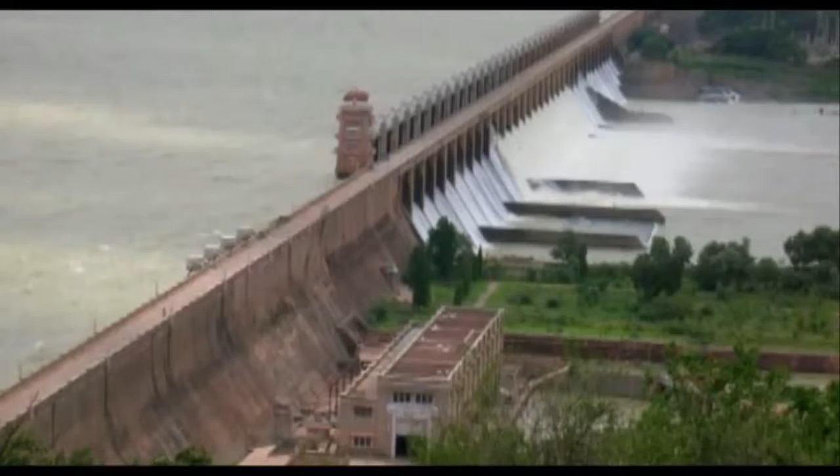The agony of a population living in constant fear of an imminent deluge downstream an aging dam. Water is a vital element that sustains life on this planet Earth. Our ancestors developed reservoirs to store vast amounts of water to support civilization. The structures erected for the purpose are called dams.

Over the years, the size and shapes of dams have undergone tremendous changes, and their purpose diversified significantly, so as to include power generation. But are we asking too much of nature and making the most beneficial discovery of all times the most potent water bombs?

The mighty Western Ghats guarding Kerala, the southernmost state of the Indian peninsula. It is the womb of 44 rivers, including Periyar, the longest river of Kerala. It is across this river that the over 100 years old ailing Mullaperiyar Dam is haplessly awaiting its inevitable destiny. An imminent deluge which may spell the doom of an estimated 2.5 million inhabitants downstream.

And what is more alarming is that its days are numbered and the nightmare may turn to a reality at any time. Not only the local population downstream, but a host of cities and townships, along with all their progress, are in peril in the event the inevitable happens.

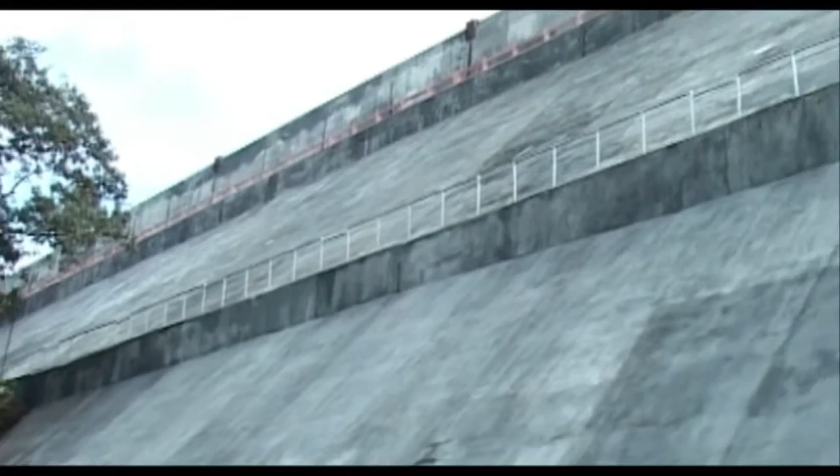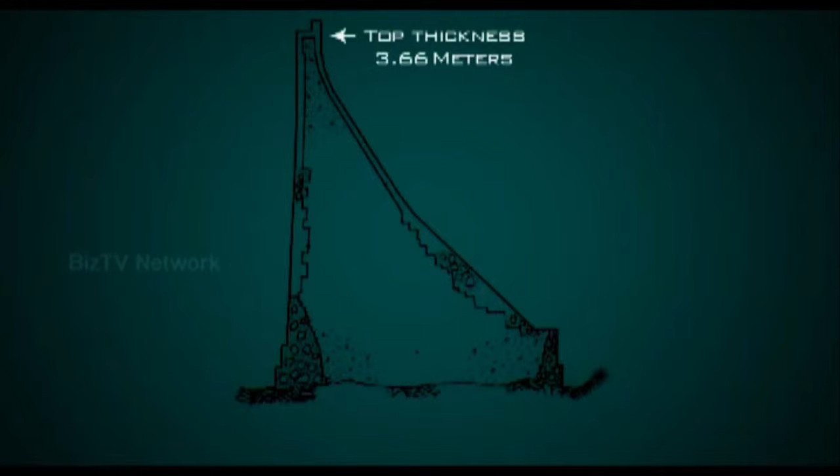The story of Mullaperiyar Dam dates back to 1895, when it was constructed across the river Periyar in crude lime surki mortar, at a time when dam engineering was in its infancy. The main dam has a length of 366 meters, a top width of 3.66 meters and a base thickness of 44.2 meters. The height of the dam from the deepest foundation is 53.66 meters. The gross capacity of the reservoir is 15.662 TMC.

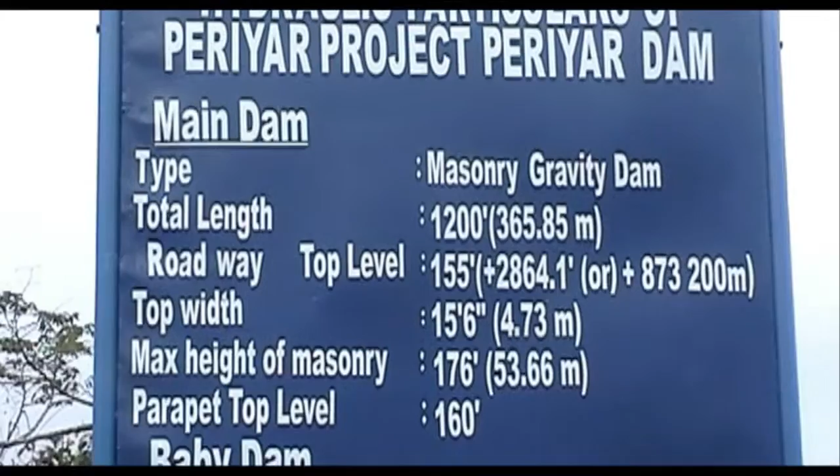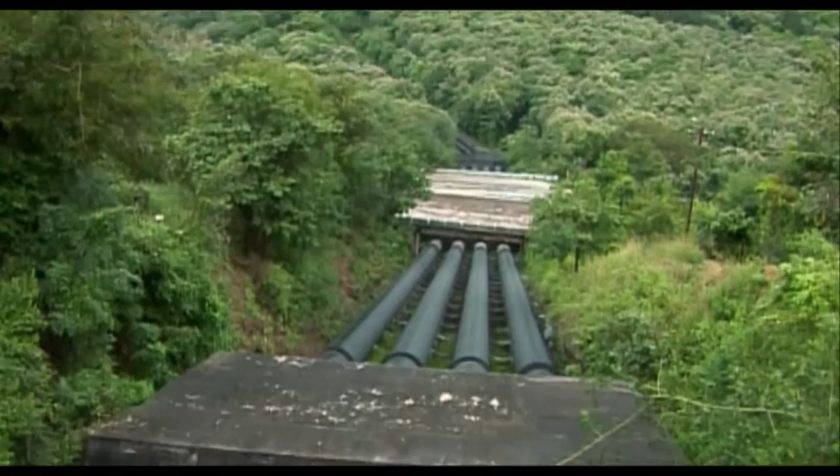The 244-kilometer long Periyar is abundant with 435 TMC of fresh water per year. It originates from Shivagiri in the Western Ghats at an elevation of 2,400 meters from sea level and joins the Mullayar downstream at an elevation of 850 meters. It is at this elevated juncture the Mullaperiyar Dam has been built for the noble cause of catering to the irrigational needs of the neighboring state of Tamil Nadu

under a 999-year lease agreement. It may be noted that the agreement was entered into by the then Maharaja of erstwhile Travancore, His Highness Sri Vishakam Thirunal, with the then Madras government as much as 61 years before India got independence from the British, and that too for 999 years, a duration unheard of in history and unfair by any standards. In fact, it was a benevolent agreement between the two states.

The agro producers from the land irrigated by this water have been serving the food needs of Kerala in a significant manner for years. A carelessly entered subsequent agreement by the two states allowed Tamil Nadu to generate electricity using the waters of Mullaperiyar. However, the fact is that the total economic advantage for Tamil Nadu is stated to be as much as rupees 7,250 million from agriculture and power generation per year, as compared to the meager annual income of rupees 1.03 million for Kerala by way of lease rent and fee, while risking the lives of 2.5 million people.

Greed is just human. But what happened in the case of this dam is that it was stretched beyond limits, and no one is bothered about the fact that the dam was aging and weakening by the passage of time. So far, so good. But it's like milking a cow beyond its age and productivity.

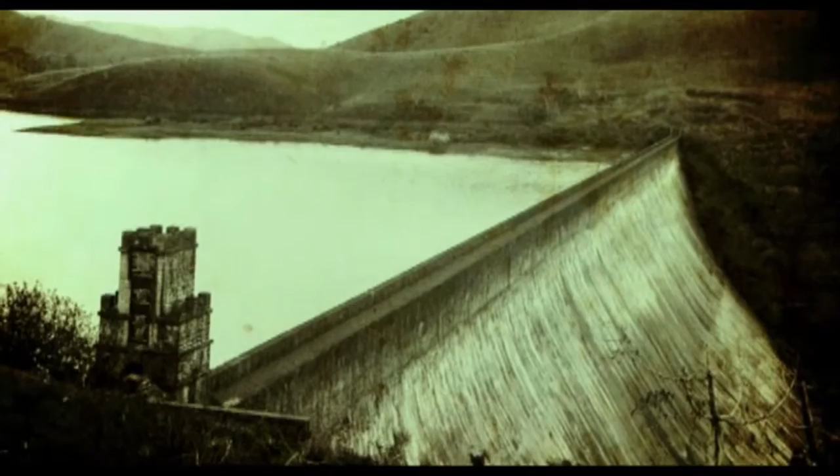The structural weakness of this dam, which has outlived its lifespan by several years, was evident from its very inception. Even the British engineer Pennycuick, who designed the Mullaperiyar Dam, had not guaranteed more than 50 years lifespan for it. It is true that there are more than 120 large dams in India today which are more than 100 years old. But the grim reality is that all these dams which have outlived their lifespan are equally prone to failures at any time, according to the experts.

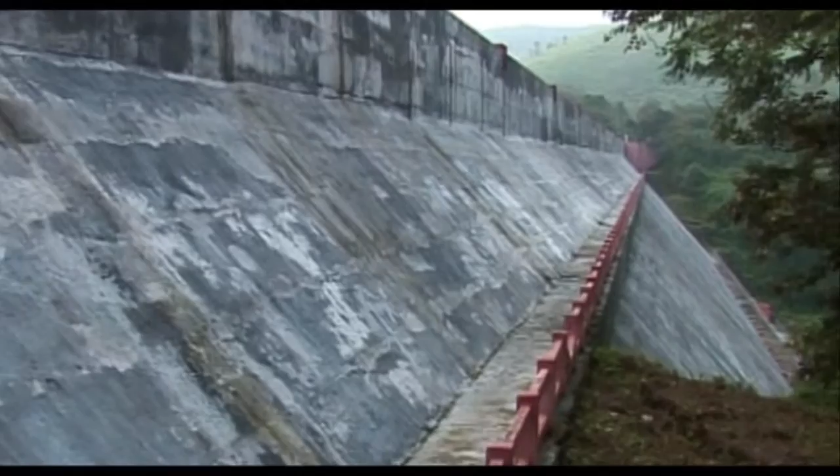It is estimated that 85% of all large dams, numbering about 40,000 all over the world, would have passed their projected lifespans by 2020, with the majority in the US and China. And here is a dam which is 100 years old, leaking from head to tail. Lime surki concrete, a very inferior concrete, constitutes almost 2/3 of the dam's core.

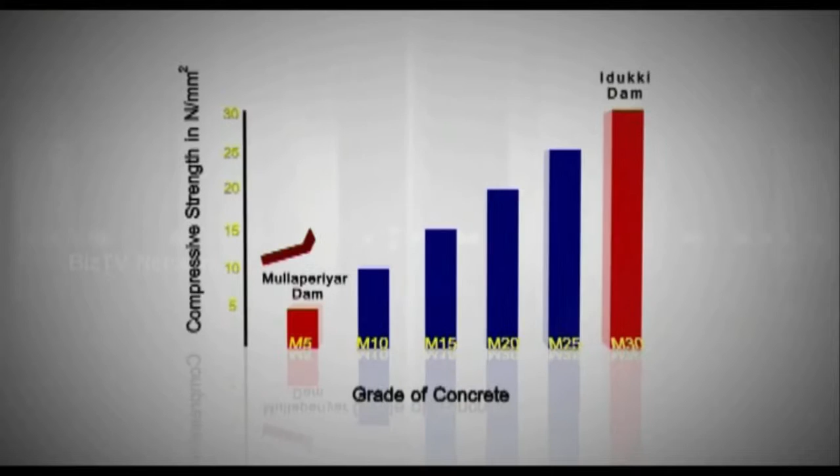This concrete, categorized as M5, is much lower in strength compared to M30, being used for major dam constructions, like that of the Idukki Arch Dam downstream of Mullaperiyar. M30 concrete has almost 6 times the strength of the lime surki concrete used in Mullaperiyar Dam.

Over the years, the strength of the surki concrete has further come down due to the continuous leaching of lime from the dam's core. The deteriorated downstream condition of the dam was exposed when the water level went to 109 feet. No repairs can be done below this level, since there has always been water below this level since 1895. Even though 2 attempts of grouting were made in the 1930s and 1960s, they were not able to completely fill the cavities formed due to the leaching of lime.

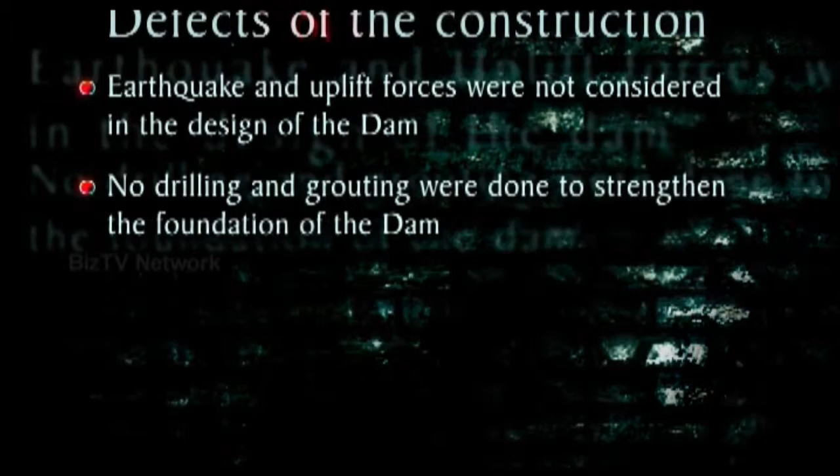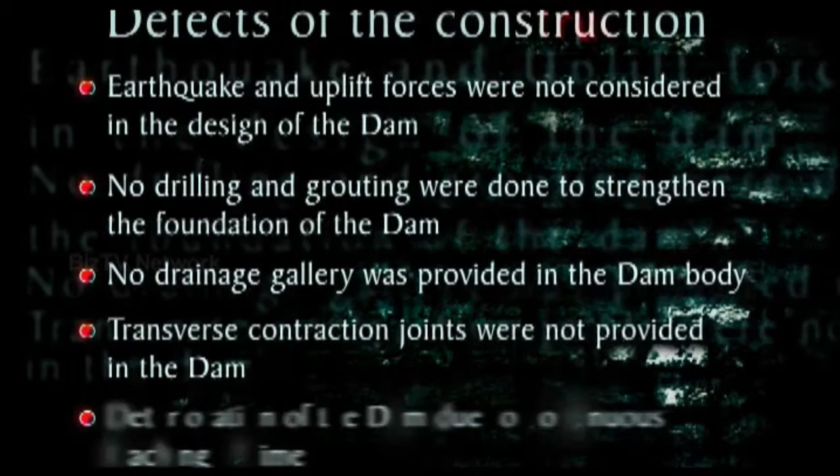Cosmetic patchworks being done on the body of this ailing dam would not make it safer or stronger, because the ailments of this old dam are inherent and deep-rooted. Some specific defects of the construction include: earthquake and uplift forces were not considered in the design of the dam. No drilling and grouting were done to strengthen the foundation of the dam. No drainage gallery was provided in the dam body. Transverse contraction joints were not provided in the dam. Deterioration of the dam due to continuous leaching of lime.

What makes the case of the Mullaperiyar Dam more startling is the fact that it is situated in an active fault zone, which makes it more vulnerable to failure in the event of an earthquake of moderate intensity. The dispute has been going on for quite a long time, but unfortunately the authorities are not thinking about the fate of poor people in 4 districts. Let's say if something happens to the dam, some earthquake or something like that, they will simply be washed away.

Within a span of 2 days, 2 tremors of mild intensity occurred on 5/11/2010 (M2.0) and 6/11/2010 (M2.9) in the 50-kilometer range of Mullaperiyar Dam, causing panic. Even though these earthquakes are minor in nature, they need to be viewed as an indication of the increased seismicity of the region surrounding Mullaperiyar Dam.

Kerala is a state blessed with pristine rivers in plenty. Landslides and floods have been quite prominent in multiple parts of the state. A heavy landslide is more than enough to cause high tidal waves that can easily disintegrate the entire dam. Torrential rain due to global warming is another threat initiated by humans. Torrential rains and floods are the ones that can break any dam, and global warming has of late increased the incidence of untimely rains and floods. The Mullaperiyar Dam is in no state to sustain such a monstrous downpour. Amid these lingering fears, the water level continues to rise during every monsoon.

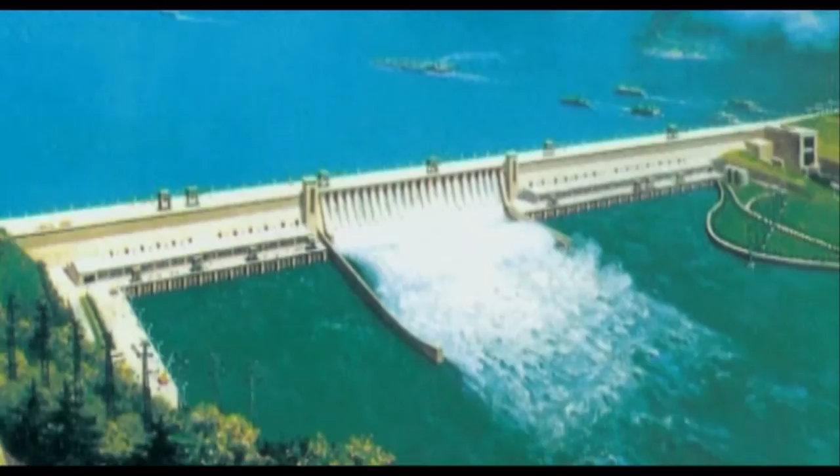The Three Gorges Dam, located in China, which is the world's largest hydropower project, reached the highest water level in July 2010 due to torrential rain, which affected over 38 million people and resulted in over 1.3 million people being evacuated. A dam's failure can happen in two ways.

One is due to earthquake failure. In earthquake failure, the heel means where the dam stands. If you have the water in the dam like this, this is the portion where the dam's heel will be having tension cracks. If the earthquake comes, it will actually move like this and it will break and fall like this, or it will break in between.

But as far as the flood is concerned, when the flood is coming, the dam will actually be balancing. The water pressure is acting like this and the self weight of the dam is acting downwards. So once the water is flowing over the dam, this equilibrium will be lost. So the dam will be overtopped. It will turn down. Most important thing is that 40% of the dams in the world failed due to flood. What is required for a catastrophic deluge in Mullaperiyar is a torrential rain or earthquake or landslide.

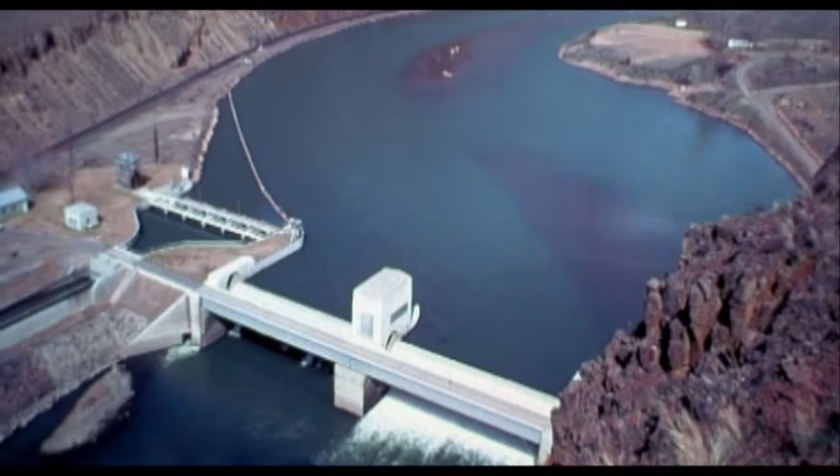The Idukki Dam, Asia's largest arch dam built of concrete, has already lost its elasticity significantly. Losing elasticity is a major limitation of concrete technology used in the construction of modern-day dams. As such, the Idukki Dam downstream, with a storage capacity of 2,000 million cubic meters, is in a critical state, which adds to the gravity of the catastrophe.

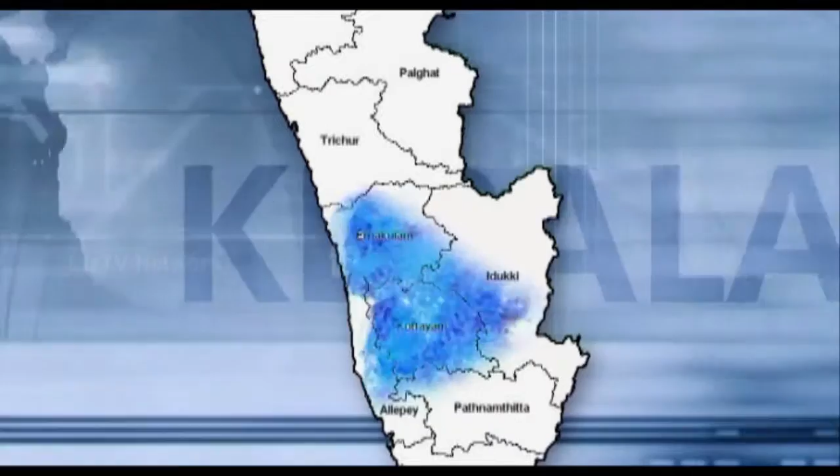In the event of the collapse of the Mullaperiyar Dam, it will spell the doom of the lives and properties of over 2.5 million people living downstream. In fact, as many as 4 districts, namely Idukki, Kottayam, Ernakulam, Alappuzha, and many towns and cities downstream, including the emerging commercial metropolis of Kochi, will bear the brunt of such an eventuality in unimaginable proportions.

We should prepare a comprehensive disaster management plan for facing such a disaster. For that, we have to carry out a systematic study of the geographic area that is going to be affected by this particular dam failure. And on the basis of that detailed study, we have to identify the spots where we will have to put warning systems, and we have to identify the places where the people can be accommodated in the case of an emergency.

The deteriorating condition of the dam and the resultant panic among the people living downstream prompted the Kerala government to apprise the central government of India about the state of affairs. The children go to sleep every night, fearing unpredictable flooding.

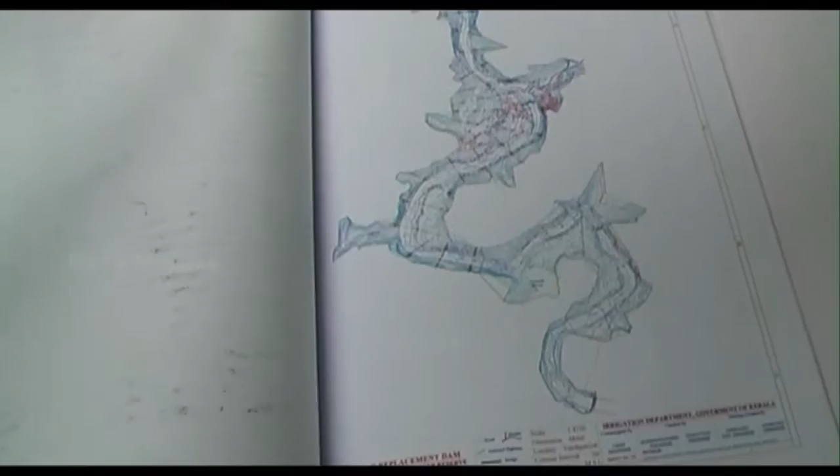The teams also recommended exploring the possibility of locating a suitable site downstream of the existing dam for the construction of a new dam. However, for reasons unknown, this proposal was not pursued. Instead, what has been going on was ad hoc strengthening measures on this ailing dam.

The dam failure would kill not only human beings, but also thousands of species of birds, snakes and animals. Definitely it will affect the ecosystem of the state, and in future it will definitely make a very drastic change in the environment of the state.

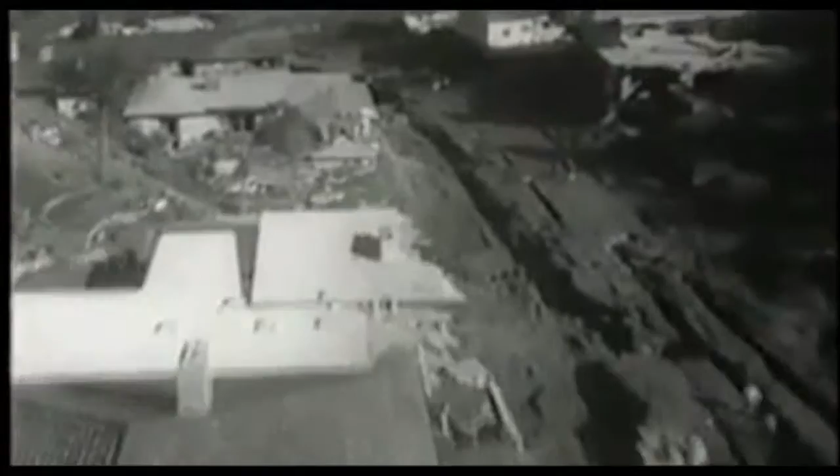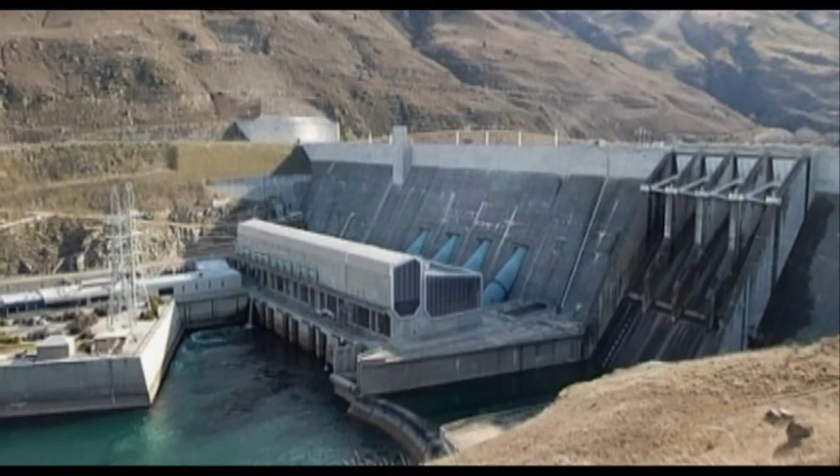Recent history reveals that at least one major dam failure occurs every year somewhere in the world. There have been more than 2,000 dam failure incidents across the world since the 12th century, but not as big as the existing ones, causing damage worth millions of dollars and loss of thousands of lives. Even modern-day dams constructed with far more advanced scientific and engineering skills have collapsed, spelling the doom of millions. Some of these disasters have proved that dams are deadlier than a nuclear bomb.

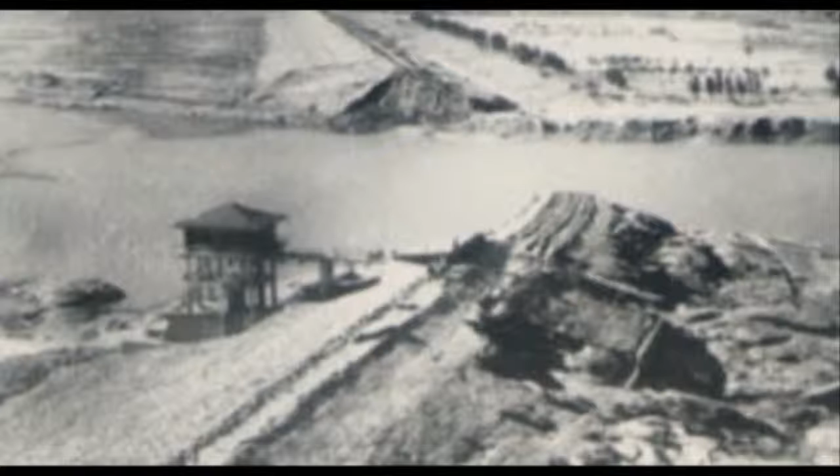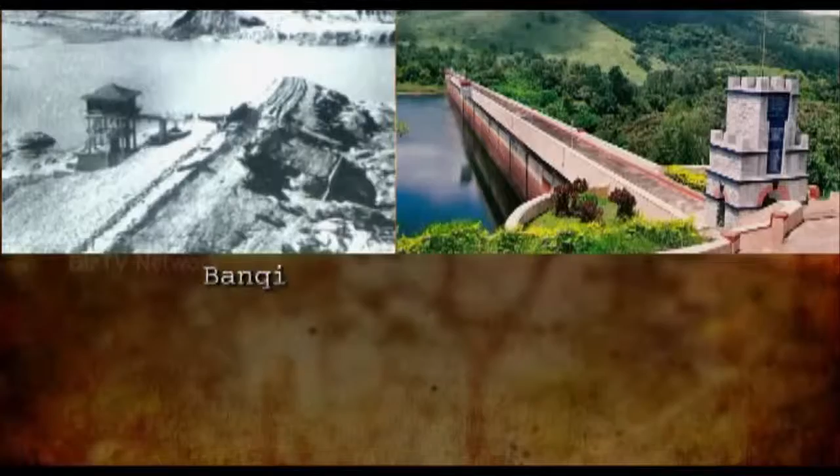One of the horrifying examples in the recent past is China's Banqiao Dam disaster in 1975, following heavy rains and floods. As many as 62 dams collapsed in a disaster, claiming over 250,000 lives. At least 4 dams may collapse if Mullaperiyar bursts, and the casualties will be 10 times the death toll of Banqiao. Surprisingly, the capacities of both these dams are almost similar.

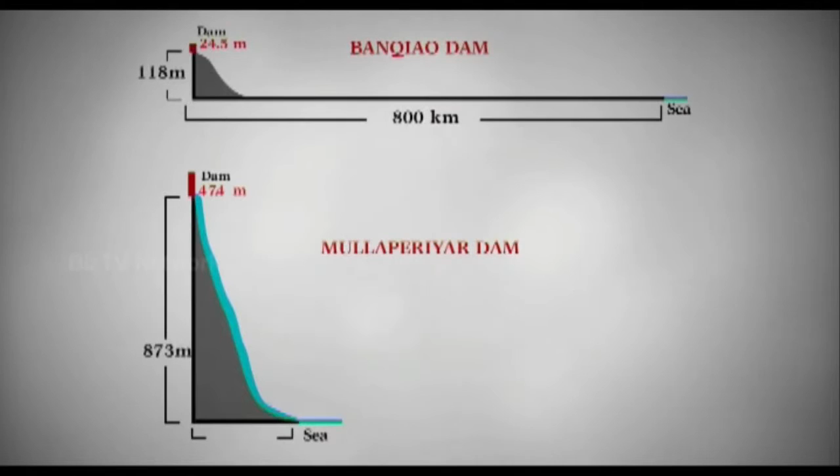But the Banqiao Dam was located at an elevation of 118 meters, while the ailing Mullaperiyar Dam is delicately perched at a much higher elevation of 873 meters, which increases the gravitational potential energy of the outflow by 7-fold than that from Banqiao. In case of a disaster, the water will rush like a bullet due to the steep, hilly geographical features of the place to reach the Arabian Sea 100 kilometers away in less than 1 hour through the thickly populated areas downstream.

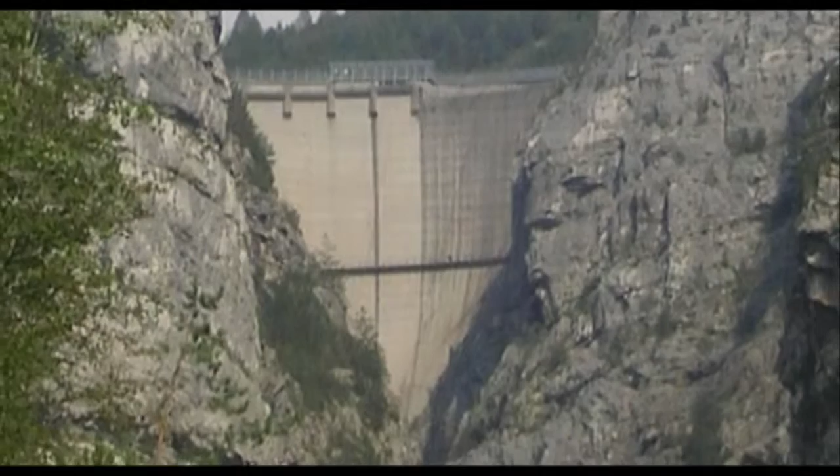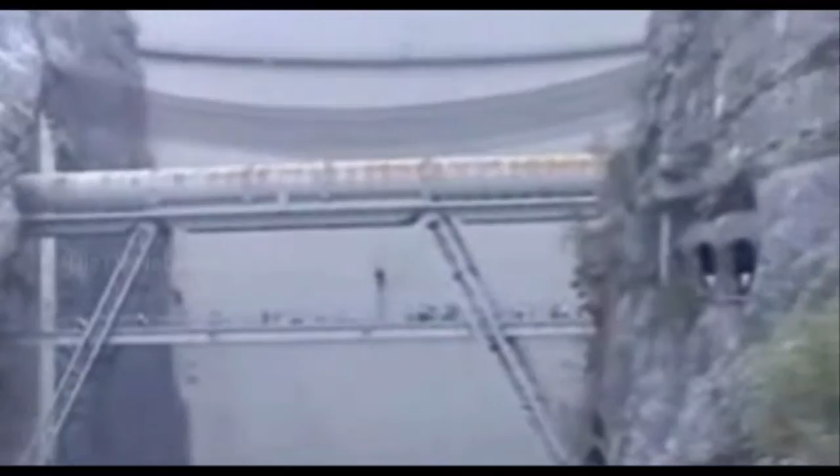Moreover, it is scientifically proven that this water bomb has 180 times more energy than the atomic bomb that destroyed the city of Hiroshima. Another worst ever dam disaster in recent history, triggered due to a landslide, was the Vajont Dam failure in the Italian Alps in 1963. A 250-meter high tsunami caused by a killer landslide swallowed several towns with its inhabitants.

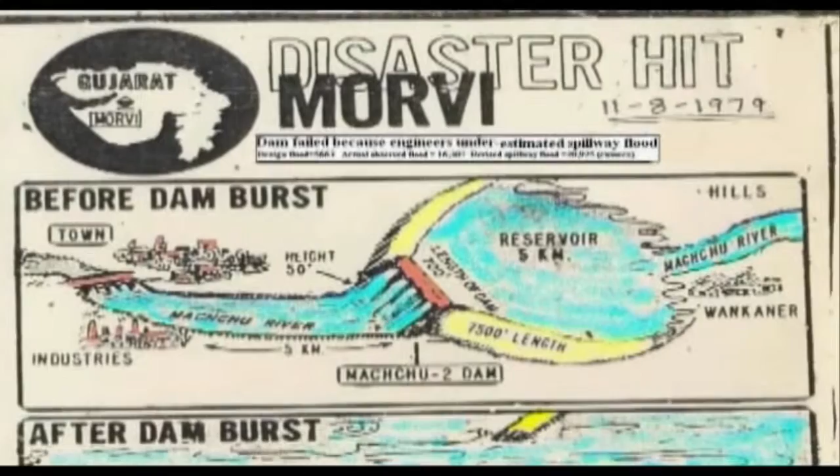Old dams are the ones which pose a life-threatening situation for people worldwide and are expensive in maintaining. Let Mulla Periyar not turn to be a new avatar of the Banqiao Dam disaster. Let the Mulla Periyar issue be an eye-opener towards the case of more than 4,000 outdated dams across the world threatening millions of human lives.

There are so many intriguing questions. Do the governments across the world have the financial potential to replace all these outdated dams? Will the existing ones survive till they are replaced? How is it possible to stop the operation of an aging old dam abruptly while it's being regularly used for irrigation, freshwater supply, flood control, or power generation? What technology can stop torrential rain due to global warming? Is the concrete technology more dangerous than surkhi? Is the modern civilization destined to be washed away in dam disasters?